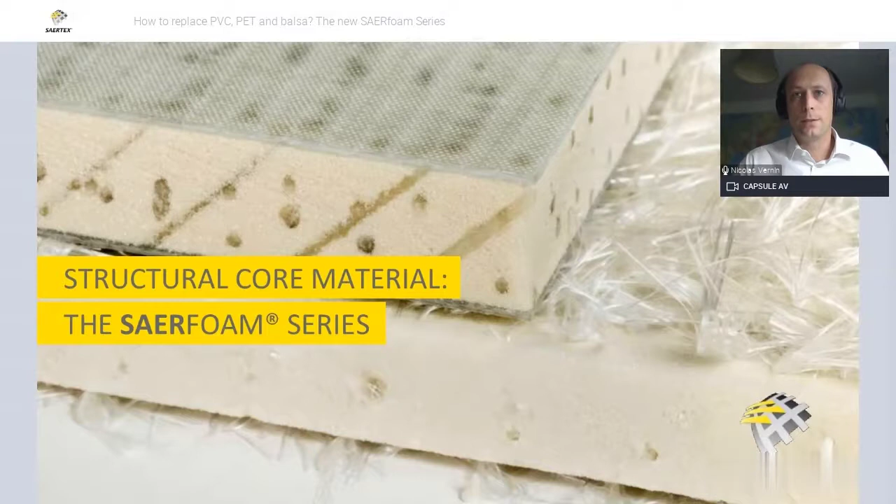The goal of today is to inform you about our structural core material, the SAERfoam Series, that is a perfect fit to replace PVC, PET or balsa approach in industrial applications. So what you can expect from this presentation is first to see the product in use. I think it's very important for you to see that, even if it's digital. We have prepared a video for that.

I want also to share this innovative draping solution that SAERTEX has developed for this product, and also share with you the success story for a marine customer.

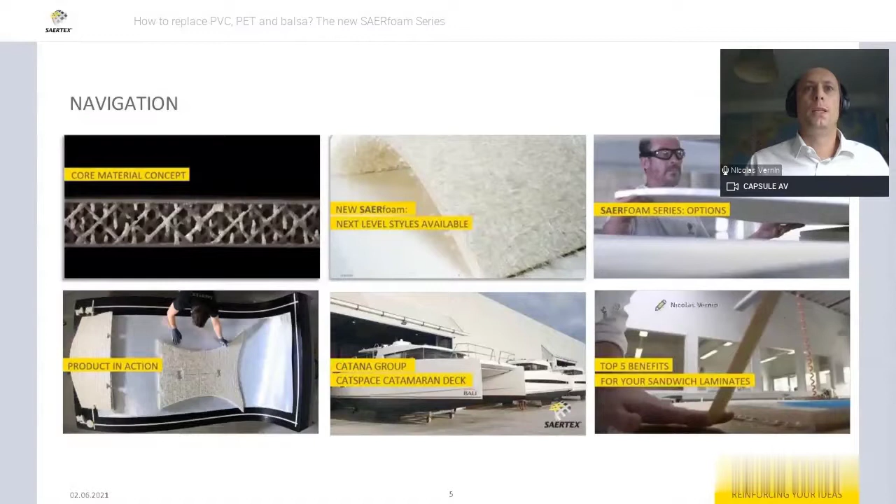Across this presentation, I'm going to explain you this core material concept of the foam, also what could be the available products, what are the available solutions and options, the product in action, and the Catspace catamaran success story, as I just mentioned before, and I will wrap up with the 5 benefits for the sandwich laminates.

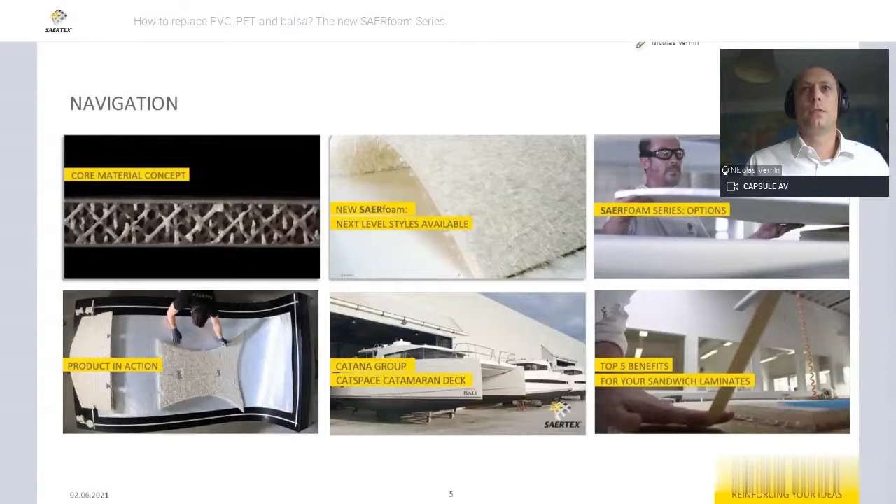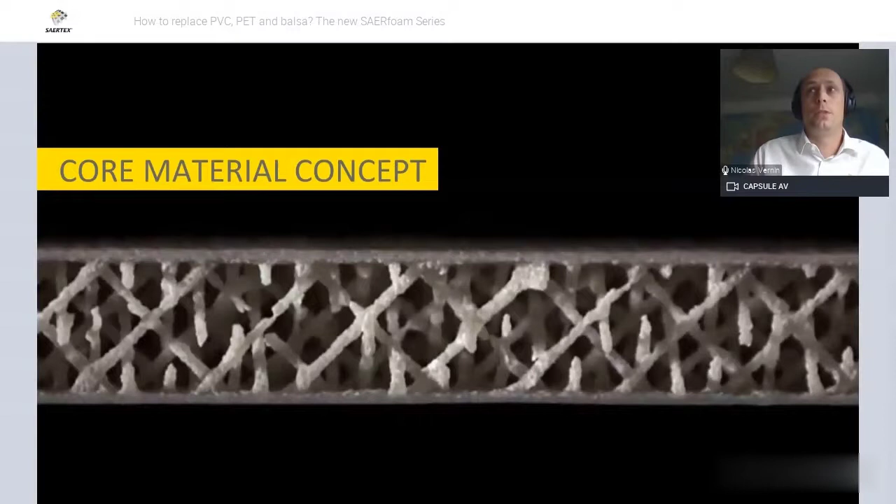All right, so the core material concept of SAERfoam. This product is a so-called engineering core. An engineering core is the concept of using a lightweight material where we are introducing glass fiber through the thickness to handle the shear loads, compression loads of the sandwich structure. Let me show you that in a small animation there.

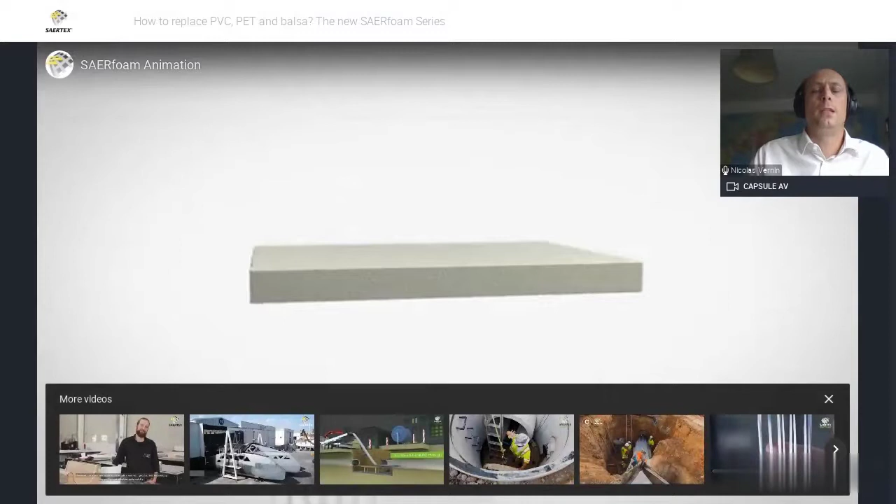So we can see this lightweight product. It can be PU, it can be polyurethane. So it is polyurethane. It can be PIR, polyurethane with a bit more isocyanate in it. We can also use polyethylene, but the main product, the main use that we have currently is out of polyurethane, because that's the best match for industrial solution at the moment.

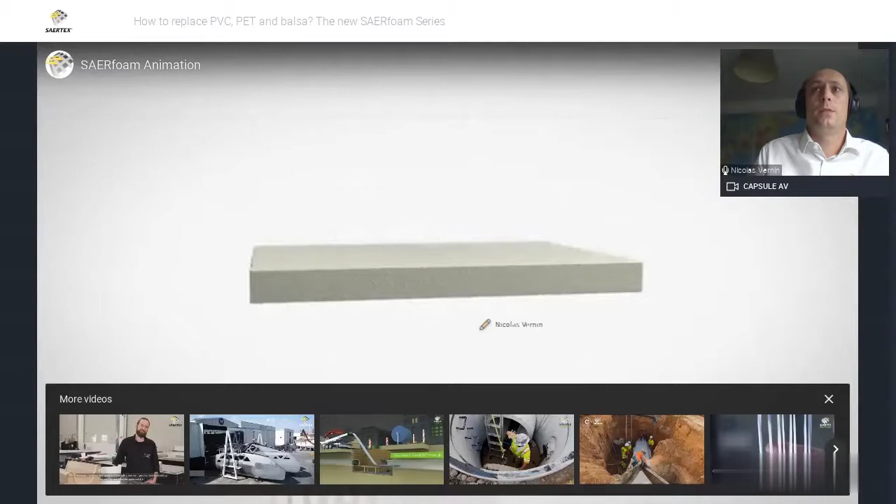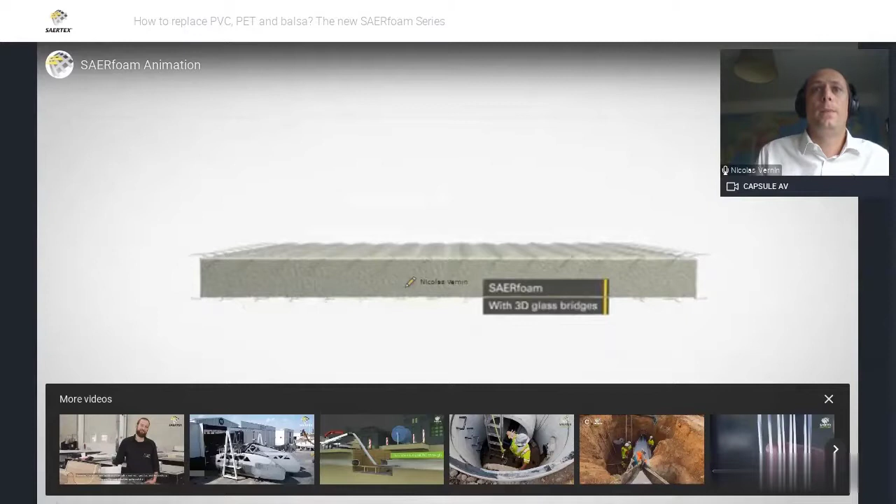So within this product, we're introducing glass fiber with a specific patented process, and we're introducing this glass fiber with a specific orientation, with an angle of 45 degrees. We can also do 90 degrees, but most of this is 45 degrees to handle the shear loads. And this will connect basically your A face to the B face, connecting the two skins together.

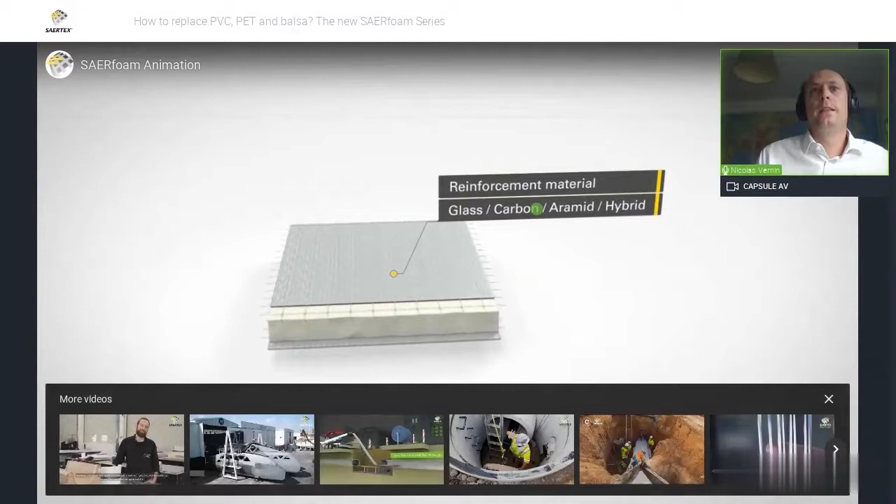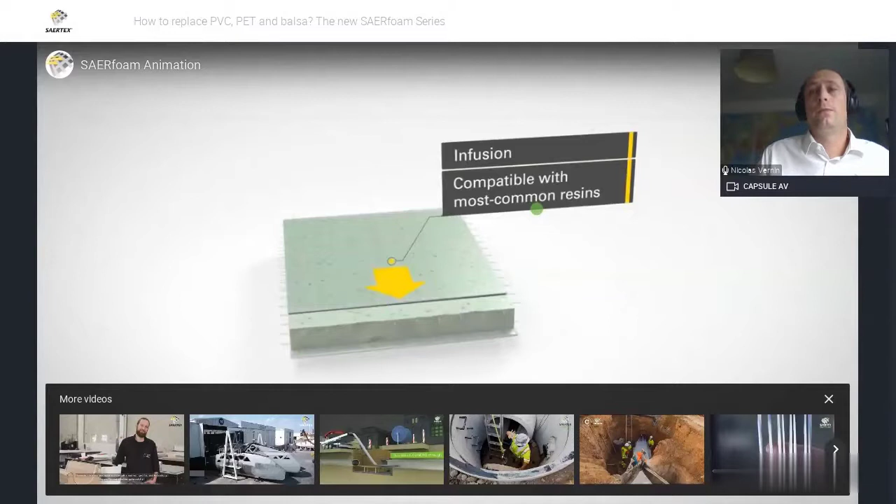Then the product can be used as any other type of core material by laying down glass or carbon or aramid or any kind of hybrid material on top or on the bottom, and then we use this product mainly in RTM or infusion processes. It is fully compatible with epoxy, with polyester, but also we have customers using it in phenolic resin or polyurethane resins. This is a multi-compatible glass sizing in it, so it works perfectly and is a perfect match for that. Definitely, it is a product for closed mold processes, because that's where we will get the most of the mechanical properties out of this product.

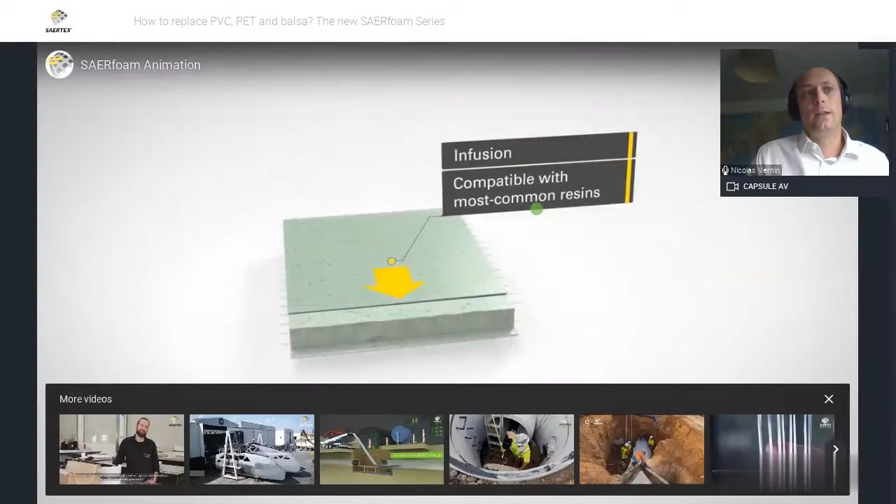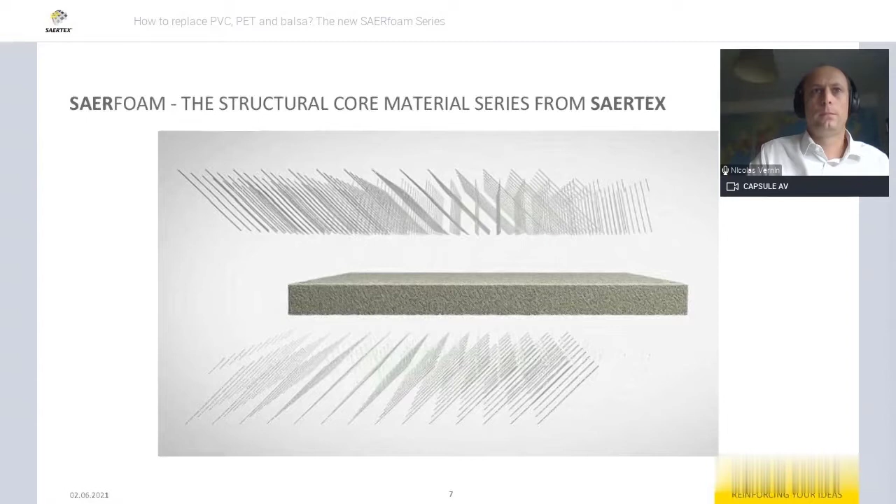Okay, so this is the concept of the product itself. So let's see how the product looks like. This is on this example. This is a polyurethane base foam core on which we have introduced glass fiber within a specific process. This goes to connect your A face to your B face, and you have remaining available glass on top and on the bottom to connect with the skin.

It is also an interesting product because due to all these glass bridges, we have a number of connections that enable a very good permeability of the product. So within infusion, for example, you have a very good infusion rate, infusion speed, and you will definitely avoid having dry spots while infusing large parts.

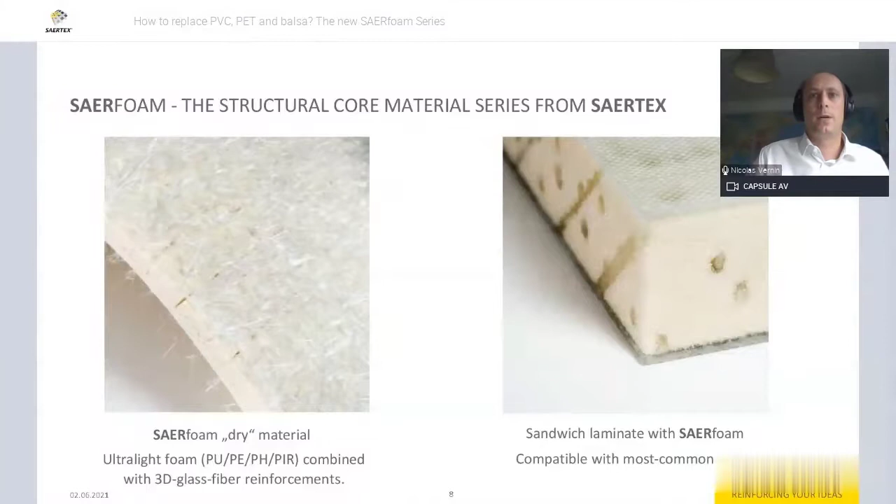So let's define the range of the product very quickly, as shown in the snapshot. We have the SAERfoam 60 and the SAERfoam 80, which are the two standard products. The SAERfoam 60 is more dedicated to RTM process due to the foam core we're using. The SAERfoam 80 is the perfect match for infusion process and large parts, since you can really use it in hulls or large shells. And we have the last product, the SAERfoam Plus.

The SAERfoam Plus is more of a bespoke product, produced on order, where the engineering team at SAERTEX is able to define specifically the weight and mechanical properties to match your requirements or certifications. This SAERfoam Plus also integrates fire protection solutions, which are Leo solutions for fire protection.

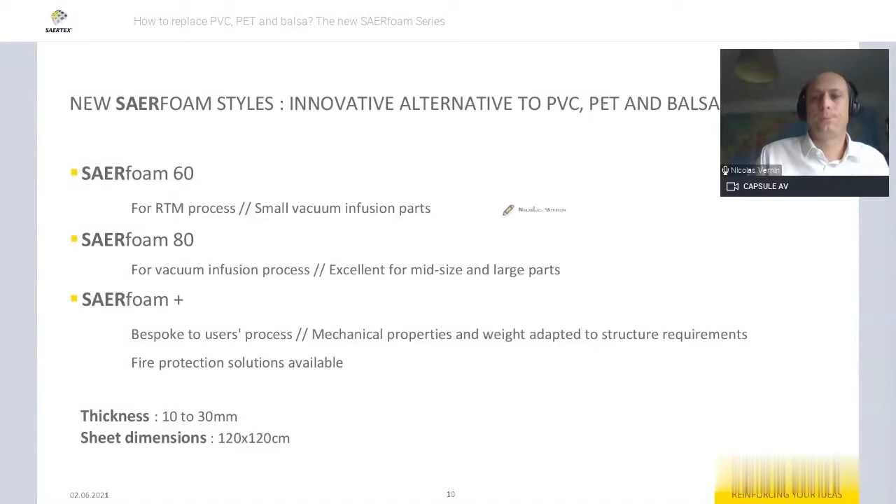These are the typical options we have, and here we'll see some interesting things that differ from what you can see on the market. This is a common groove section to help the resin flow. We also provide kittings from a facility in Europe.

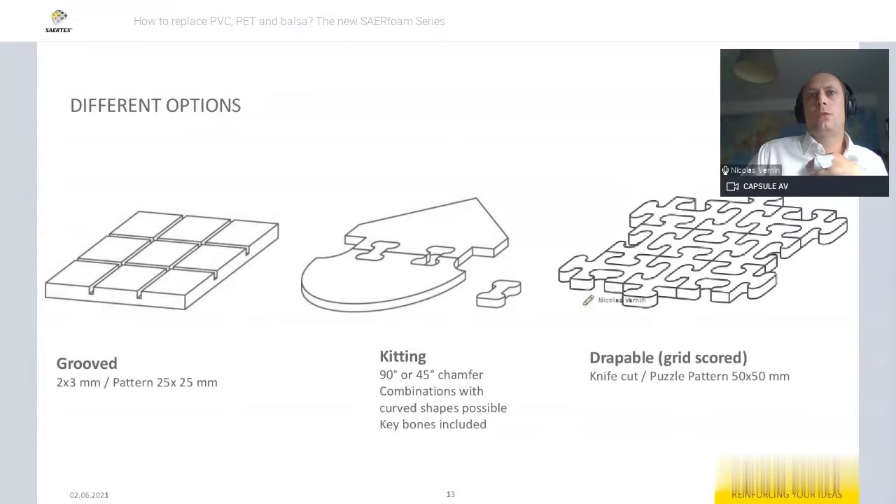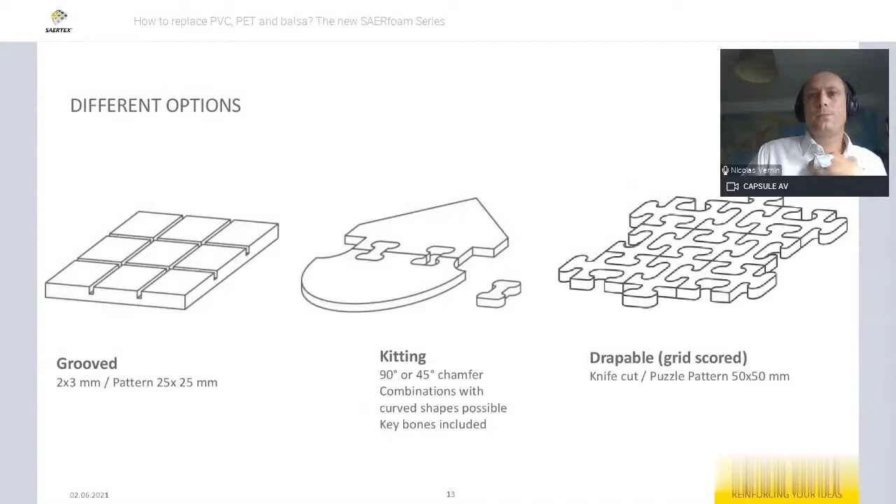We are also able to offer this new concept of drapable grid core solution. This grid core solution has been called the puzzle pattern at SAERTEX. It enables a very good surface finish while having a drapable surface.

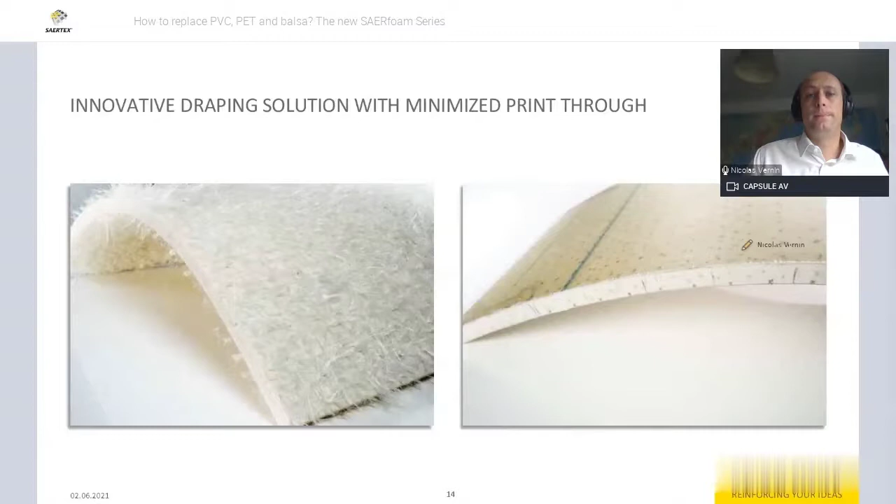Here's a small example of that. We basically cut about two-thirds of the thickness of the core, with no cuts on the other side. This completely differs from what you may know with balsa, PVC, or PET, where usually you have a scrim behind that holds all your squares.

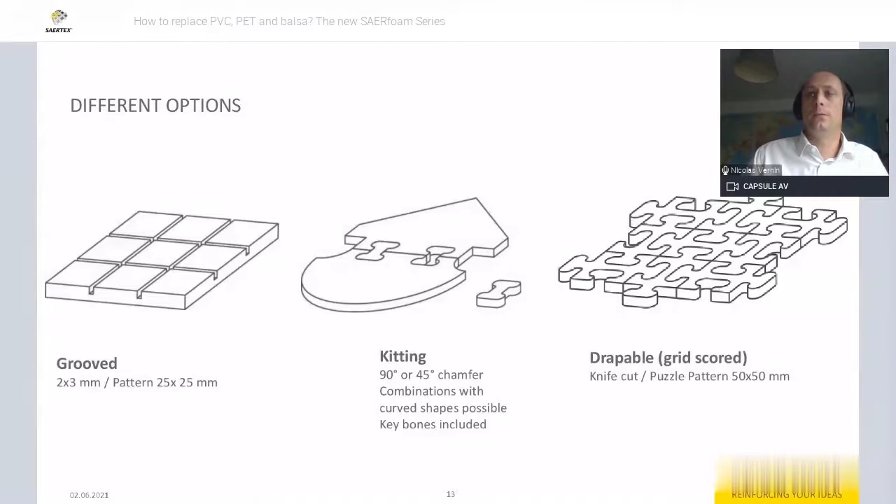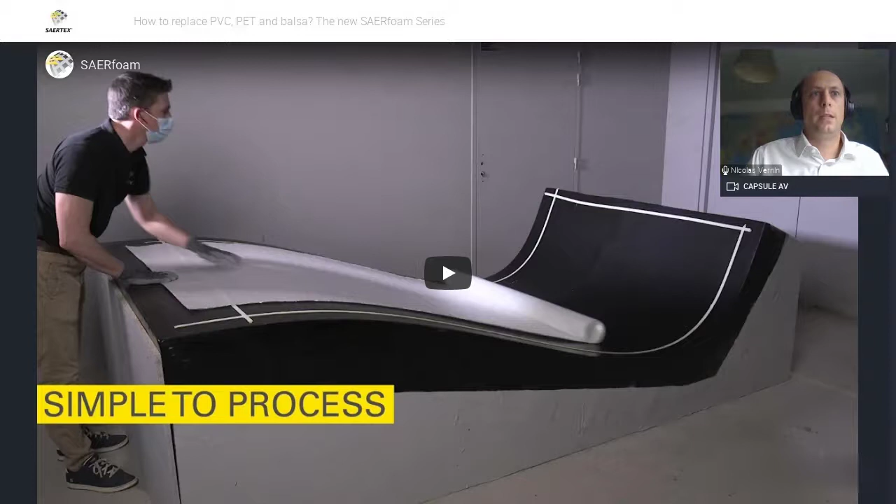Maybe I can show you this in action, which will be easier for you to understand the system we use. Let me pull that up—here we go. I'm going to comment live on the video.

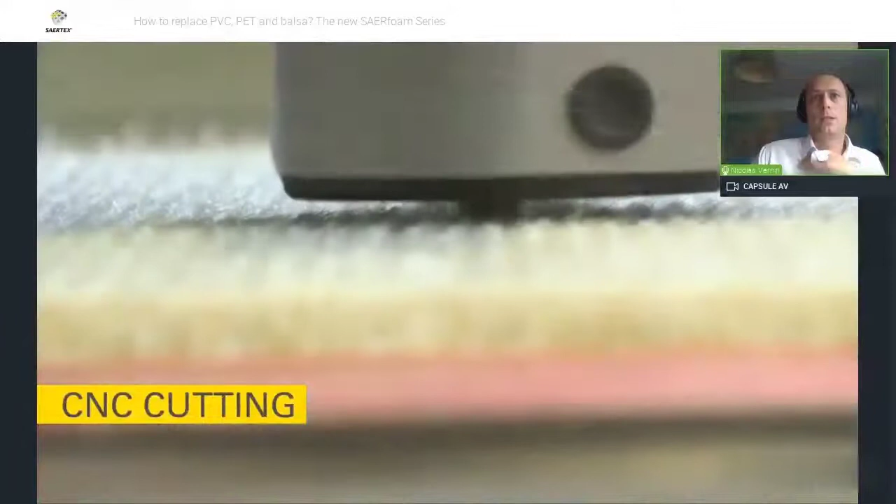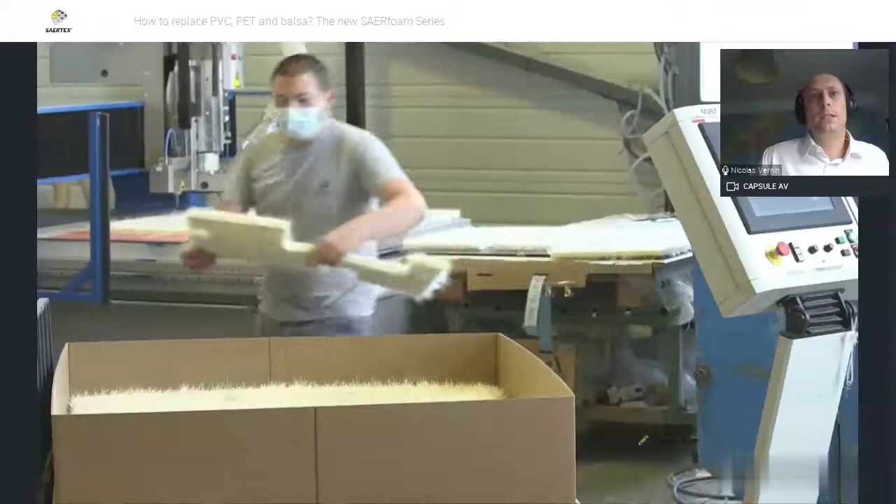First, at our facility in France, we produce this product. We can also do CNC cuttings. So we start with the CNC cutting here, where we can cut 45-degree or 90-degree angles. We can do very sharp edges, and then we prepare that into boxes for kittings so our customers have ready-to-use material straightforward.

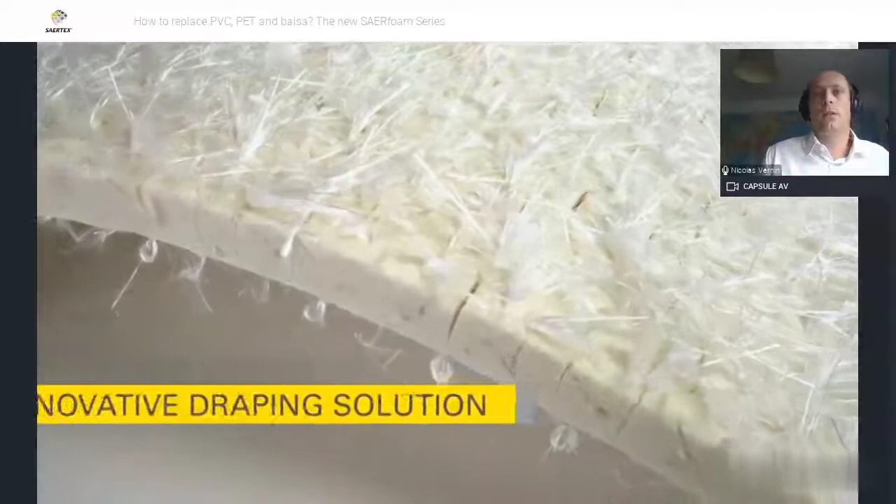We definitely have systems with key bones to connect everything together. We see here the draping solution, where we can very easily drape the product. On one side you have the puzzle side, and on the other side the non-cut side, giving the perfect surface finish.

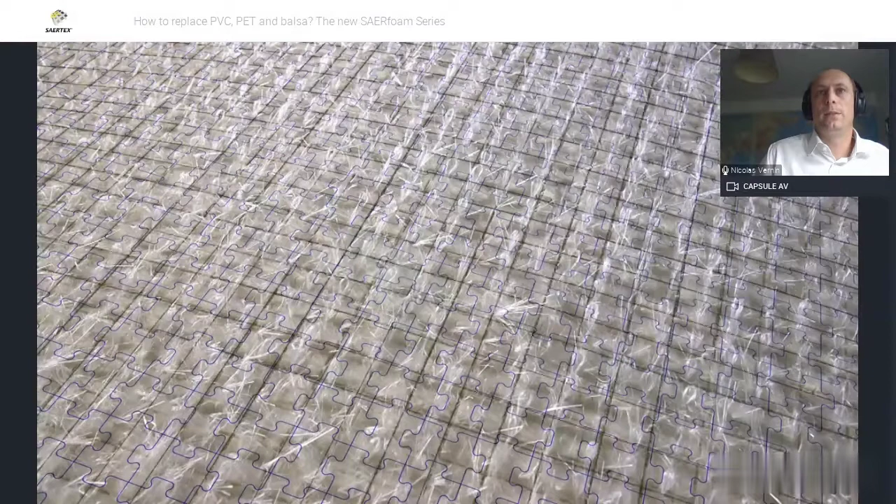We can combine the two products together, having puzzle and grooves. The grooves are there for resin infusion, and the puzzle is there for drapability.

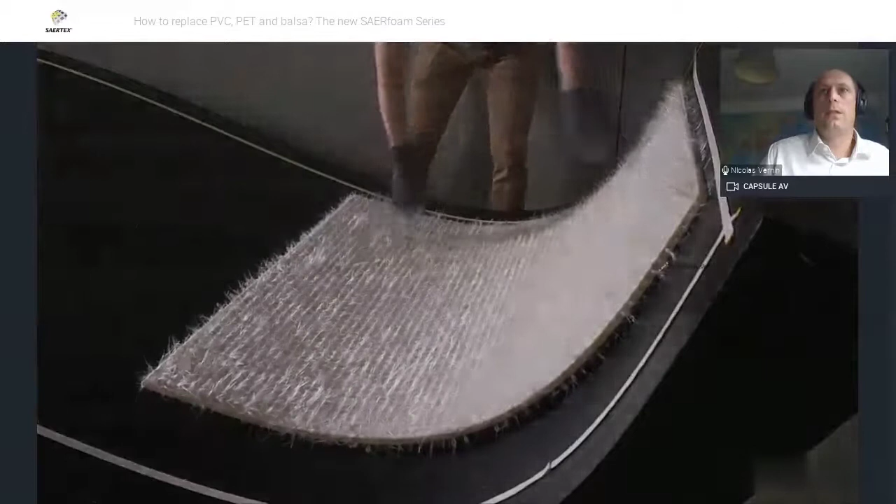We can also tailor it to the size requested by the customer. You can see here that from a puzzle, we can deform this product within a certain angle and certain radius. But also, if you have relatively smooth curvatures, thanks to the PU, you can also not use them.

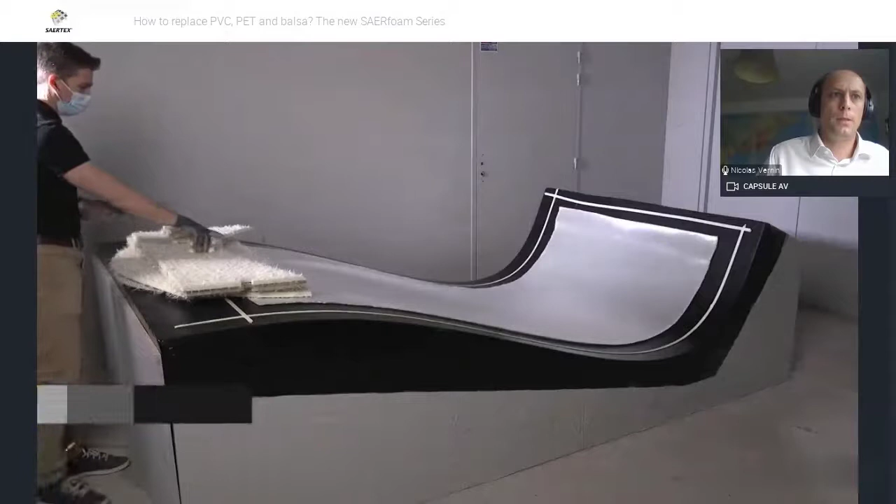Let me pause there—that's an important point. You can definitely avoid having the puzzle or the grid score, because the polyurethane is a relatively deformable product, so you can save resin intake by using a plain sheet to follow your curvature.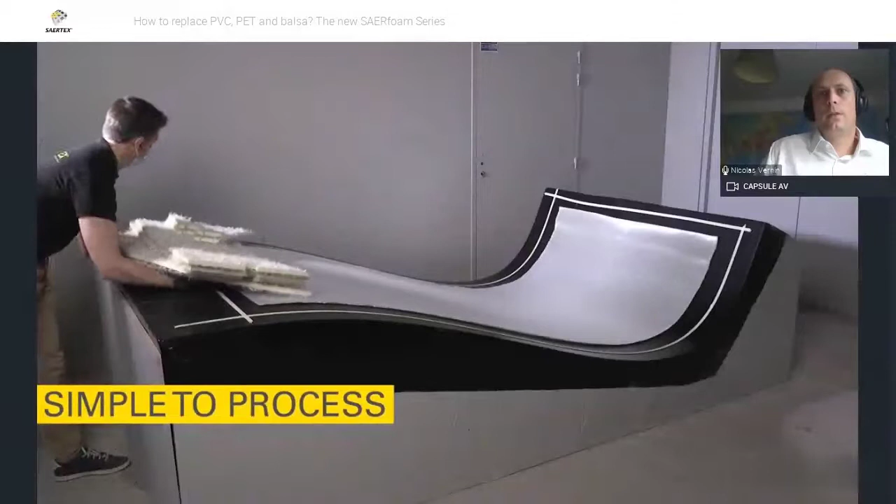This product can then be used like any other type of core laid on the fabric—a very simple assembly kit there with keyholes.

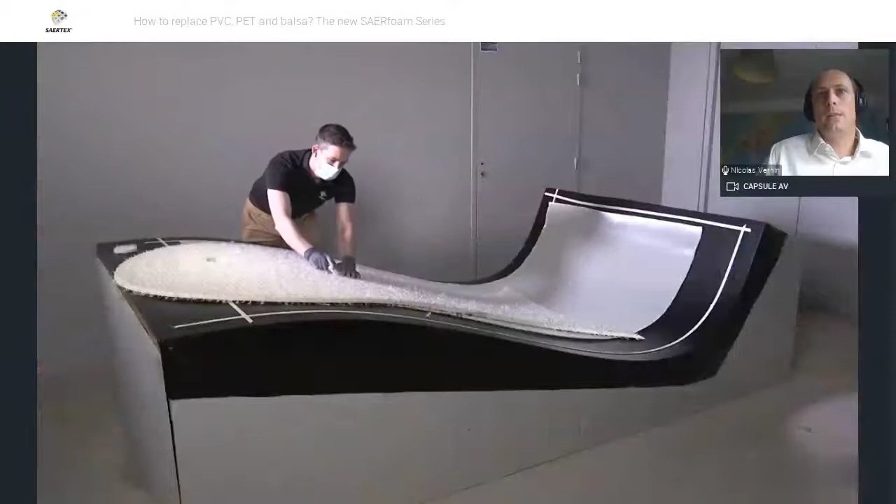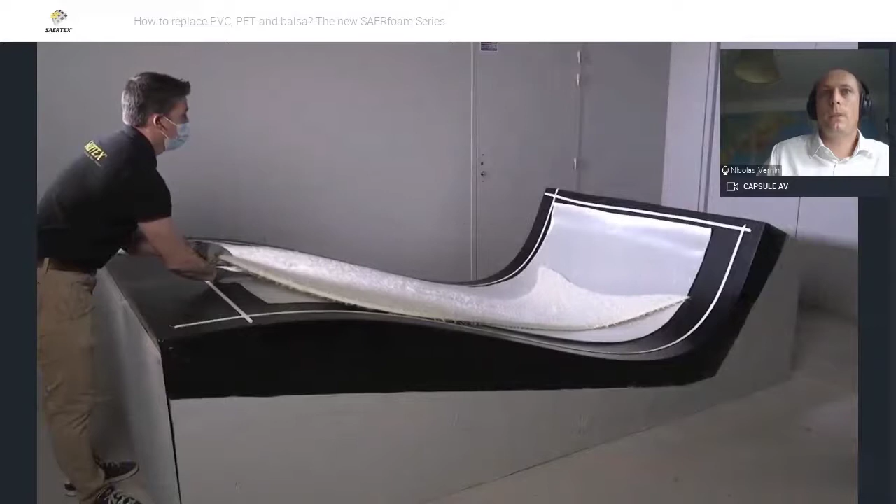One part of that kit, shown here on the right-hand side, is the puzzle, and the other part is made out of plain sheets, because we don't have much curvature there and need much better drapability on this side. That's why we see plain sheet on the left side and the innovative puzzle solution on the right side, which saves resin consumption.

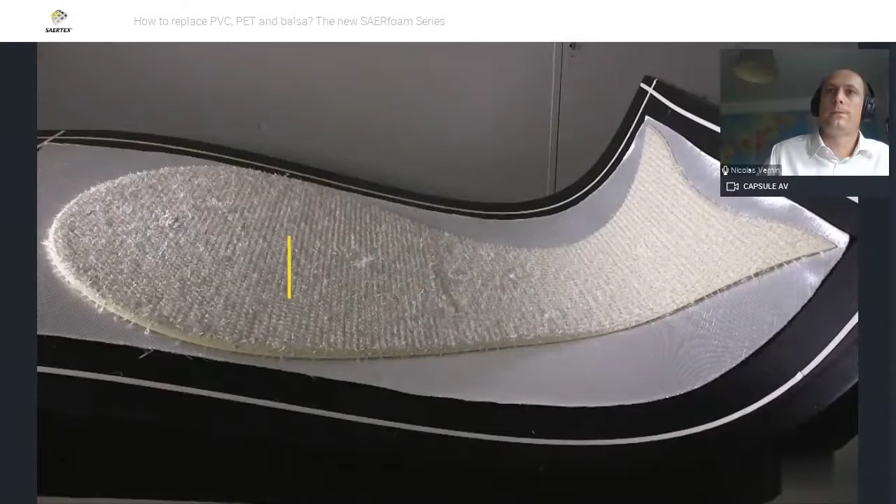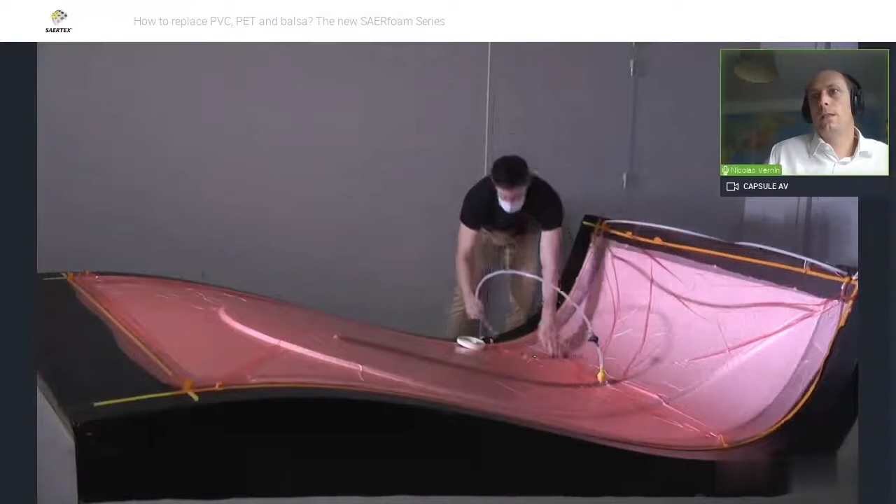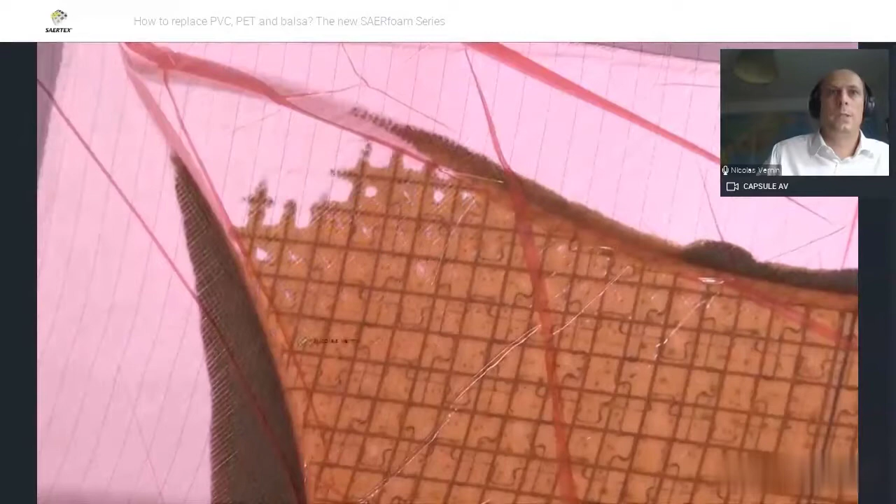Okay, and then you can infuse it. Straightforward. The infusion speed is very excellent thanks to these multiple bridges that you can see, it gets impregnated very, very quickly. And it means also that the B face, the face underneath, is quite well impregnated directly, so you avoid having the difference between the two resin fronts.

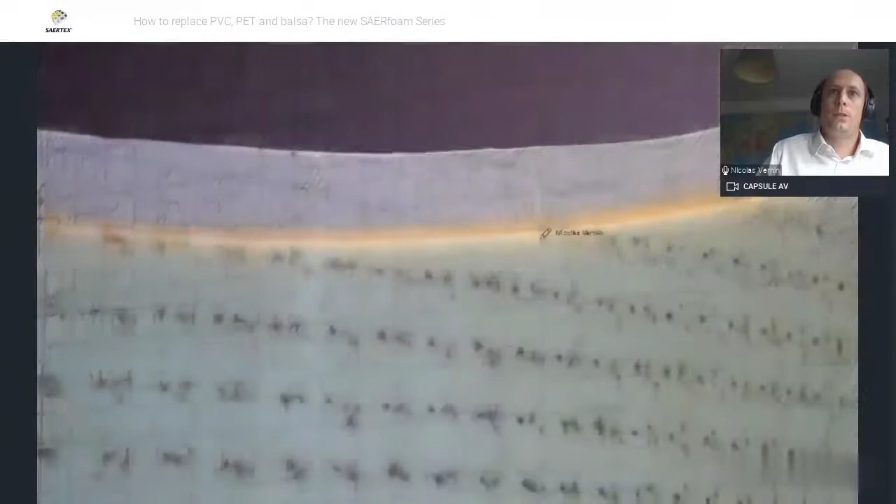We can also see from this side the puzzle, which is on the A face, and the B face, the mold face. You can see here that we avoid having any cuts from the grid. So on the A face there's the puzzle, but on the B face there's no puzzle, because there are no cuts through the thickness.

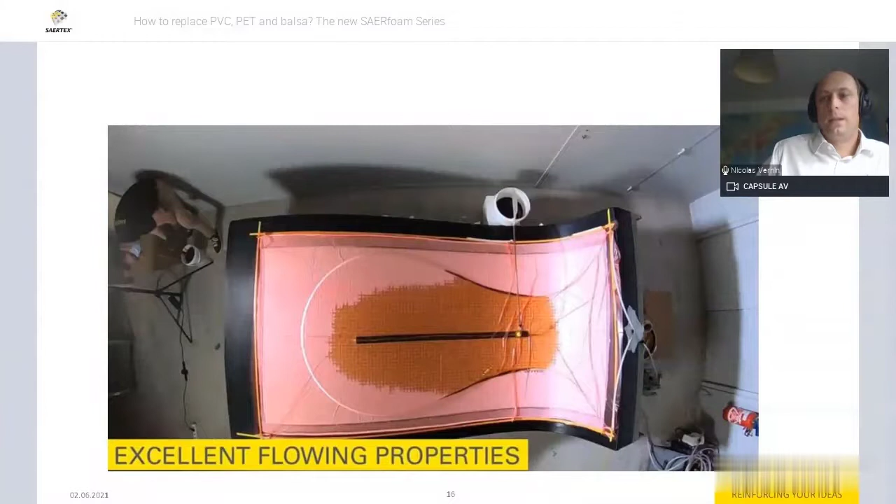Okay, so now I want to share with you a bit of information about the success we had with Catana Group, CatSpace Catamaran Deck. This started in Tunisia back 3 years ago, when Catana Group, one of the largest manufacturers of catamarans in the world, was looking for making a new model.

This was a model they wanted to produce one every 2 days. This is a catamaran deck, which is about 100 square meters. The idea was to do all the deck in RTM and the hull in infusion, and to be as quick as possible and as reliable as possible to produce that.

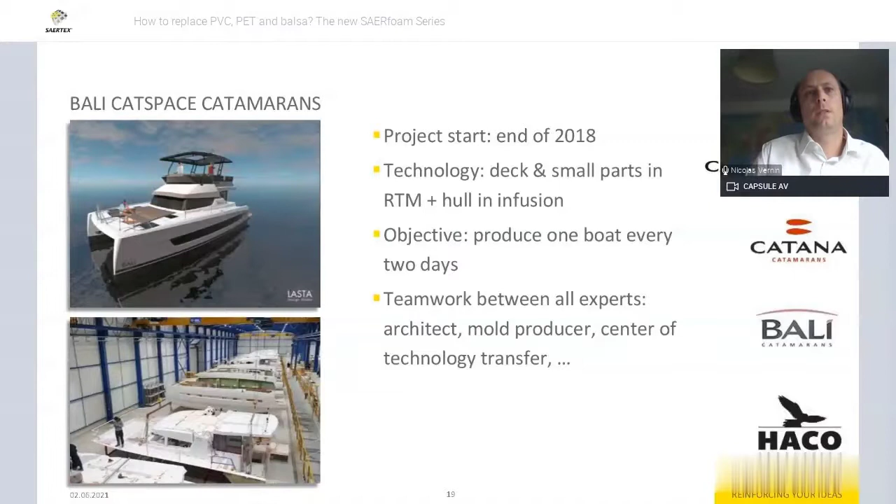This has been quite a success, because we've worked through a lot of different applications with the customer and engineering, and we defined a SAERfoam 60 for the deck. Maybe the picture is a bit small here, but you can see this part that has been demolded, and we are using SAERfoam for the deck, together with SAERcore Max, which is an RTM product.

From the feedback of our customer, the main benefit for him was, in RTM, avoiding any risk of failure when closing the mold, especially with balsa or PVC. It's quite risky to close the mold if one of your kit templates is not correctly adjusted into the mold, and it is definitely a safe way to use SAERfoam there.

Also, the other benefit is the better impregnation through the thickness compared to PVC and PET, because thanks to these multiple bridges across the thickness, which are glass, it enables a very good impregnation there.

The plan for next year, or this year - it was a bit end of the pandemic - but we are starting the work to prepare an early infusion. This would be a very large catamaran infusion hull made out of SAERfoam 80. So that's the plan for the end of the year.

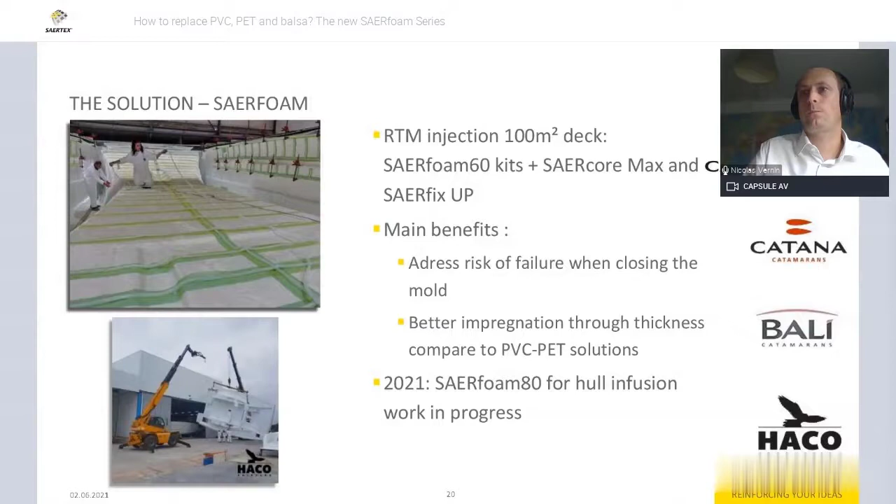Okay, let me warm up with the 5 benefits against existing solutions like PVC or PET. Now that you know a bit more about the product - I'm sorry I cannot answer all the questions in the chat, but I will have some time to answer them after I finish this presentation. So the first top benefit of SAERfoam is the shear modulus.

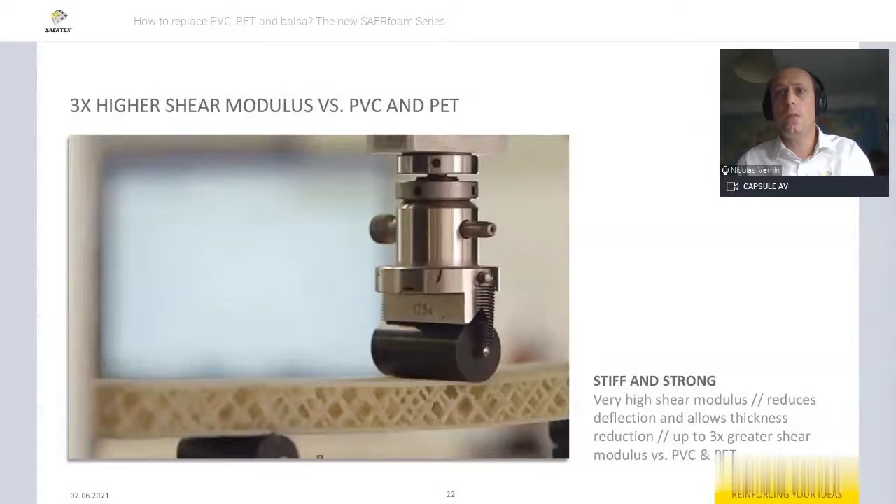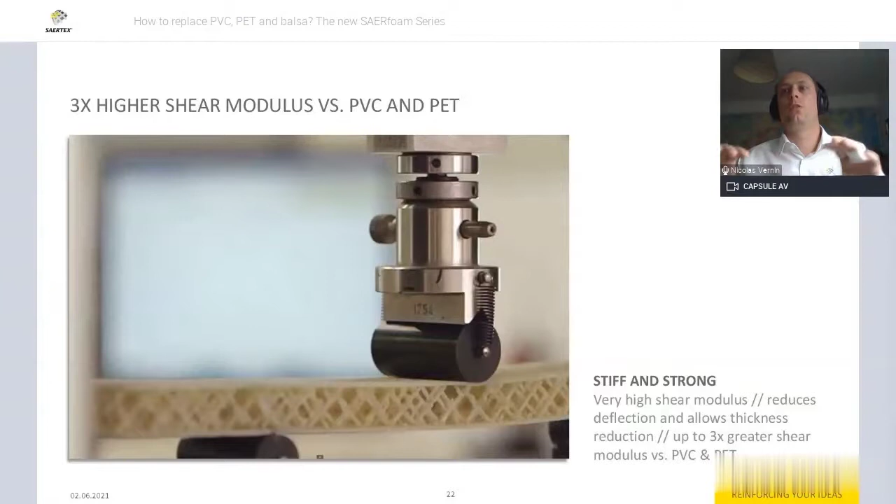It has a very high shear modulus, about 3 times the shear modulus of PVC and PET. This will definitely help reduce deflection, and also allow new designs to reduce thickness, because having these 3D glass connections really enables you to hold the composite all together. So you no longer have just a foam skin - you really have a composite that goes all across the thickness.

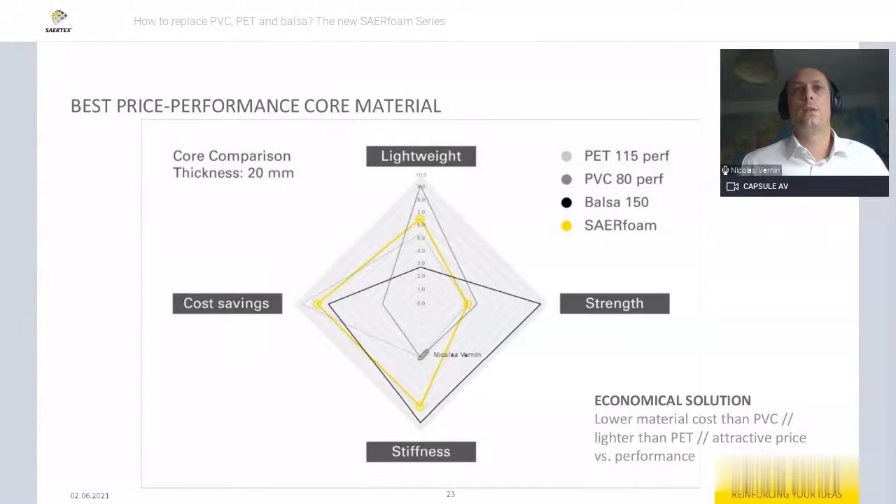Here, for example, the impregnated weight of SAERfoam will be between PVC and PET. In terms of strength, we are similar to PET and PVC, where balsa is definitely very high, but no one is really designing for strength at the moment in the industry. The stiffness here is quite interesting, because it's relatively close to balsa stiffness - it exceeds by about 3 times the stiffness of a panel made out of PVC and PET.

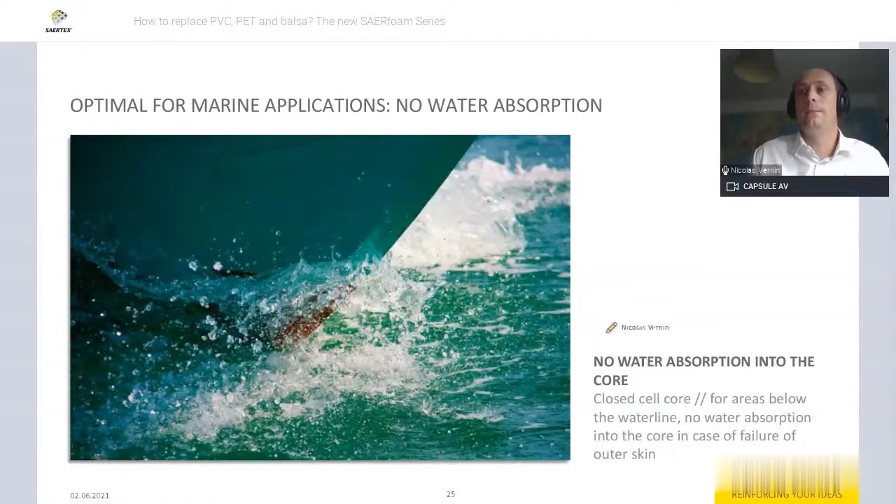Third, it's an optimal product for marine application, because we are using closed cell core, so there is no water absorption into the core. It's also qualified for areas below the waterline, because even in case of a failure of the outer skin, SAERTEX has performed extensive tests comparing PVC, PET, and SAERfoam that show that thanks to this 3D connection, your impact area or delamination area is very limited, and similar to what we witness in PVC or PET. So you have no more water absorption than what you get within PVC or PET closed cell cores.

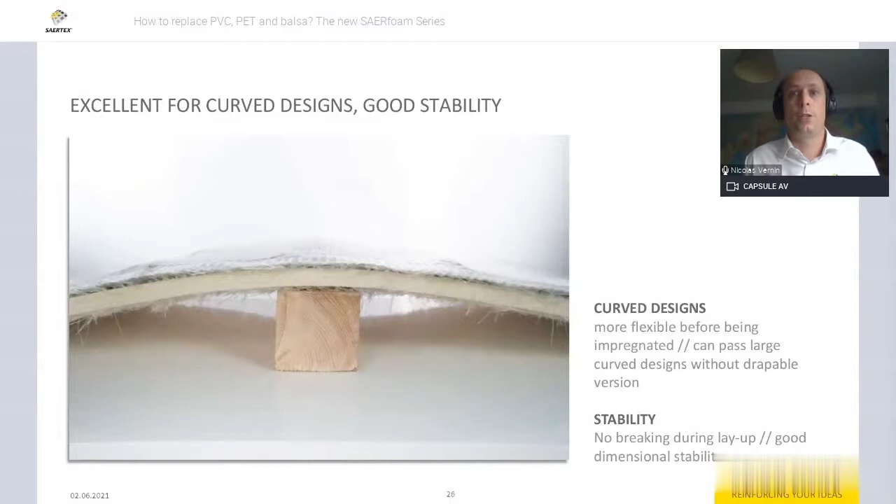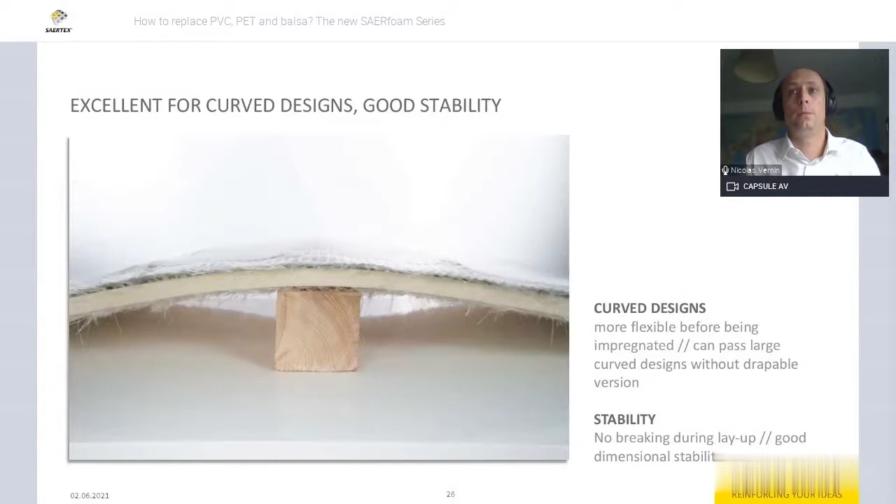That's a very nice product for curve designs. First, if you have a slight curvature, you can use it as a plain sheet, so you can pass very large curve designs without a drapable version. It is also very stable, with very good dimensional stability, and a good product for insulation because we're using PU. So it's a product that fits very well to curve designs.

And if you have more difficult curve designs, you can use the puzzle solution, which is a perfect solution for curve shapes. The resin consumption can be reduced by one kg per square meter thanks to this, because we are knife cutting and have large puzzle pieces. That also reduces the print-through on the B face, which is this face here. For the example, we've left out the gel coat to show you by transparency.

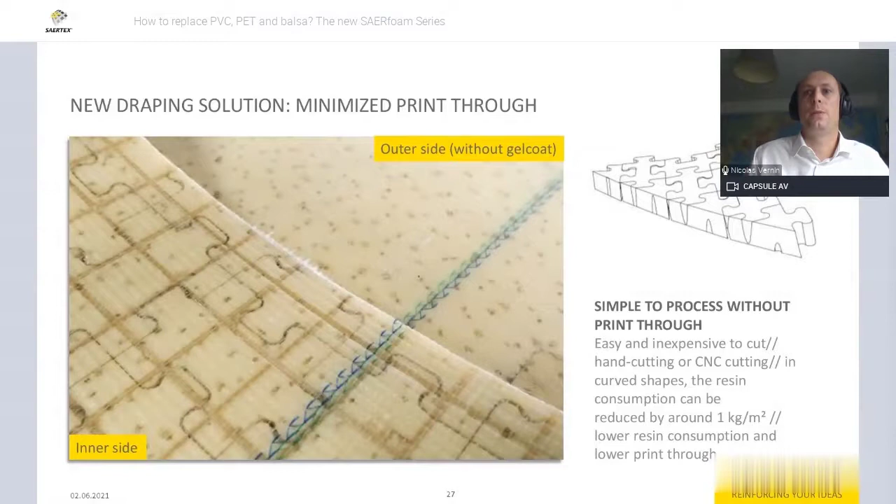All right, I'm very happy that I've been able to go through that. The presentation has been a bit short. I'm going now to answer some of the questions that I can see.

One question is how weight compares with and without the glass in the PU foam. Basically the PU foam is about 40 to 60 kg per cubic meter, and the glass is about 300 and 200 grams of glass in it. So most of it is PU because that's the spacer. I would say 20-30% of it is glass, and the rest is PU.

The recyclability of SAERfoam is not proven yet, because we have not been able to recycle the polyurethane. But thanks to this solution of SAERfoam, it does enable us in the future to use recyclable foam core and then reinforce it, bringing mechanical properties to it. That's the entire concept of SAERfoam, and that's where we are looking forward on the sustainability topic.

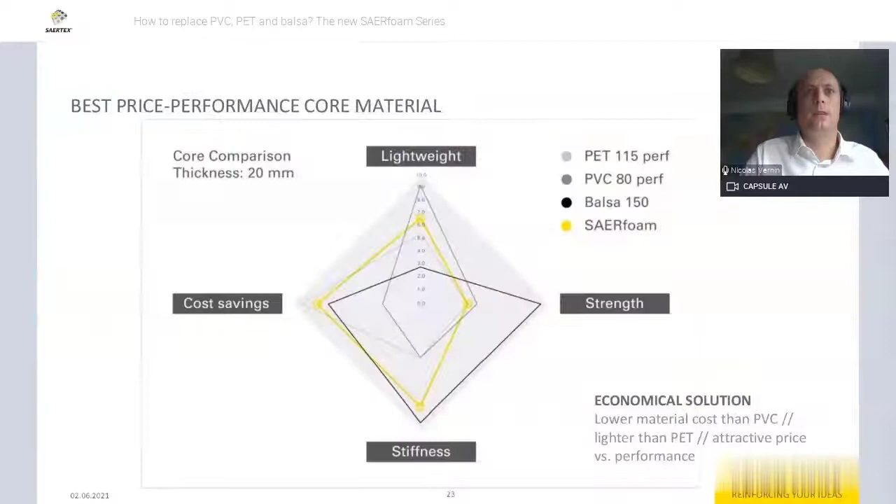There's another question on the glass bridges: are they heavily influencing the density of the foam? As I said, the density of the foam is written there. You have the dry density here, which is about 60 to 80 - SAERfoam 60 to SAERfoam 80 - and also the comparison with PVC 80 and PET 115. You can see these are the infused density, the impregnated density, which gives you an idea of the end density of the product. That's also interesting to see what makes PET, because PET is also a very heavy product at the moment on the market.

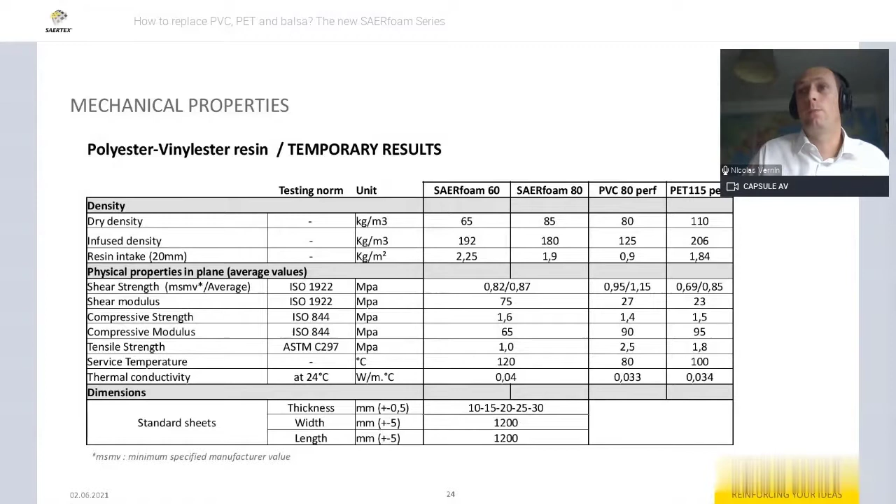Which pressure and temperature has been used in the RTM process of the Katana project? It is room temperature, so there is no assistance, it is polyester resin. And for RTM, Katana - the mold is not heated at all.

Another question: have you tried thermoplastic foam in this concept, and is it still better than PU? Yes, it is. We have tried a lot of different SAERfoam based potential products. Apart from PU, as I said, polyethylene, like polyolefin foams.

What we need within this product is to get an even distribution of the cells, and with cells that are very regular. So we cannot use a foam that has been extruded, for example - that would have been a limitation. So we need an expanded foam, expanded thermoplastic foams, which we have not found to match perfectly to this application.

One of the questions is also, what is the difference between SAERfoam 60 and 80? It is just density. The SAERfoam 60 is a 60 kg per cubic dry product, and the SAERfoam 80 is 80 kg per cubic.